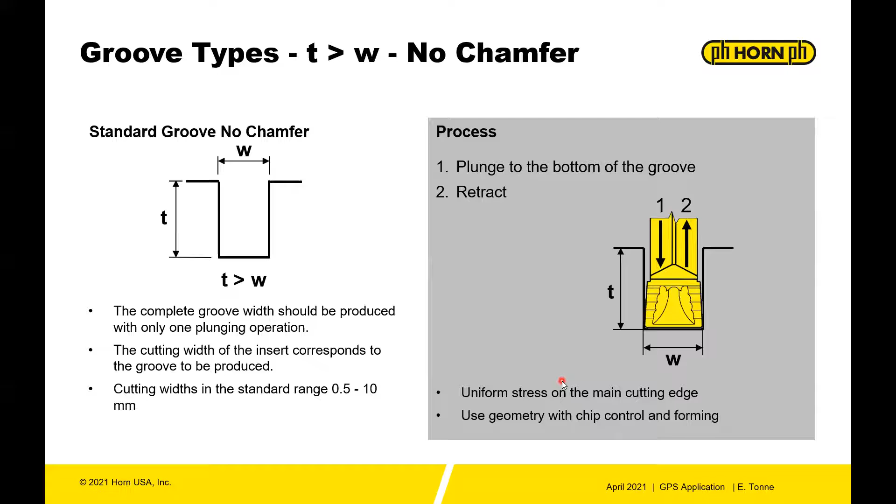And then the biggest is your risk of ring formation. So we've all seen the rings that can be produced on a part. You have to stop the machine to remove them so they don't damage other operations. And it's not a good process.

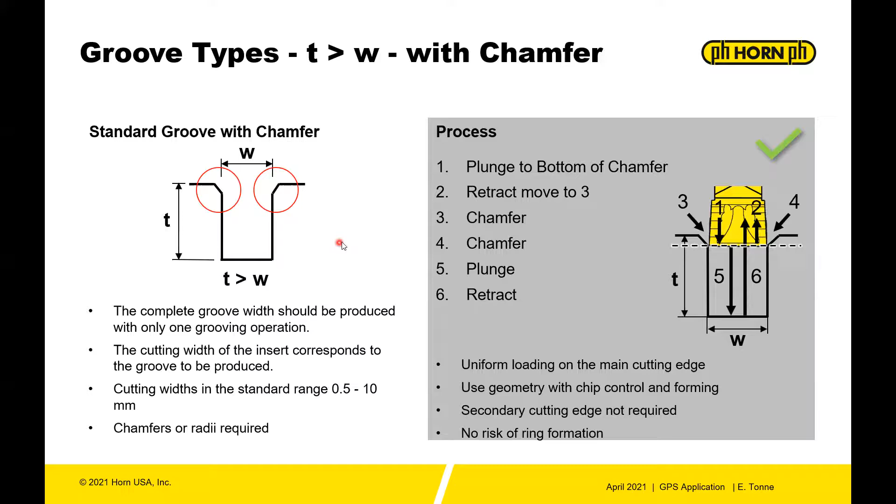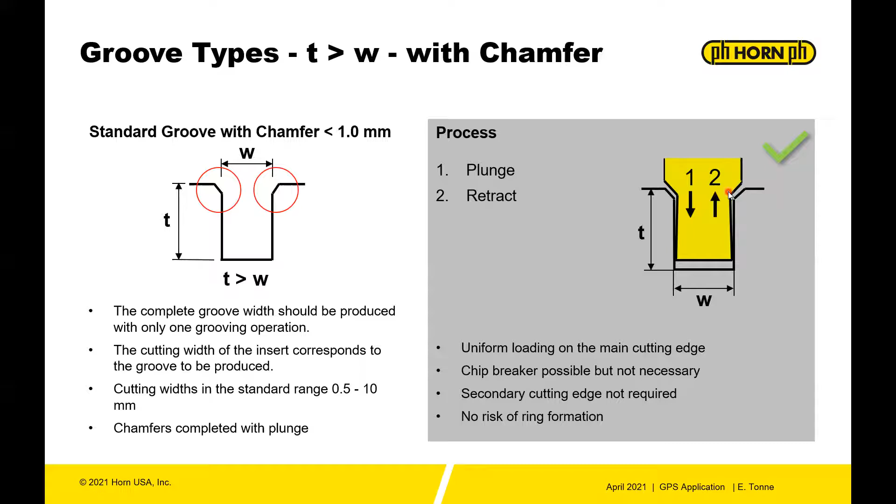You can also buy an insert with the chamfer built in. So that's a very simplistic way to minimize programming. No risk of ring formation because you're just plunging in, plunging out, and you're still getting those chamfers.

The other way to produce a groove, and this is a groove that is wider than your cutting tool. So the groove width is wider than your groover, is to plunge the center, then retract, plunge 2, and plunge 3.

Now, if you have a deeper part, a bigger part, it's better to go with the internal plunge first, or the plunge closest to the spindle or the fixing, the clamping, and then do the outside because that leaves you more room to have chip evacuation. In the case that you have very small parts, it's a good idea to pay attention to that and do the outside first and work your way towards the fixing, because you're removing some stability of the part. So keep that in mind.

So this type of process also involves partial cutting. So on the first plunge, you're using the full width of the insert, and then 2 and 3, you have a partial plunge. So it's really better to plan that out to be around 70% of the width. You don't want to go like 50-50. So plan the process out with the right width so that you can have one plunge in the center, and then you're still going to have 70% of the width here.

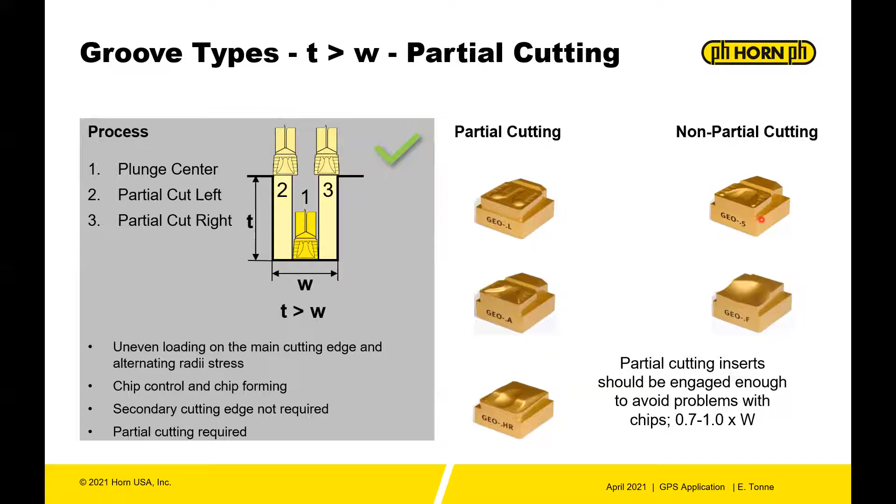You want to make sure you use a partial cutting geometry. So some of our geometries are not good at partial cutting. The L, the A, and the HR are partial cutting geometries. The S and the F are not. So we saw from our training last week that there are some that are not great at partial cutting. So you want to avoid those and stick with the ones approved for that.

The reason partial cutting can be damaging to your insert if you don't use the right type of insert is, in a partial cut and you have the right insert, the chip is funneled towards the center of the tool. And so that minimizes the risk of the chip hitting the opposite wall and getting tangled, or the chip getting hung behind the insert and causing damage to your insert.

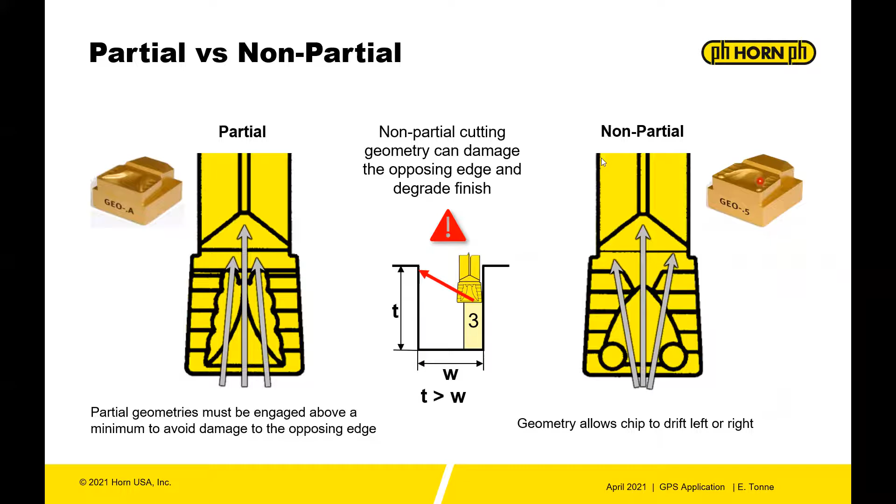So the A geometry here you can see is a good option for partial cutting, where the S is not, because the chip, once it passes the center point here, it's funneled, but then it can go what direction it wants. And so it's not a good choice for that partial cutting. Doesn't mean it won't do it, but we just recommend the A definitely over the S for partial cutting.

Another option to do a wider groove is to follow this process, which is to plunge left, 1, 2, and then plunge the upstand that's left, the 3. The advantage there is that you can increase your feed 100% for that center. So for instance, by doing that, you're going to improve the cycle time of this part significantly.

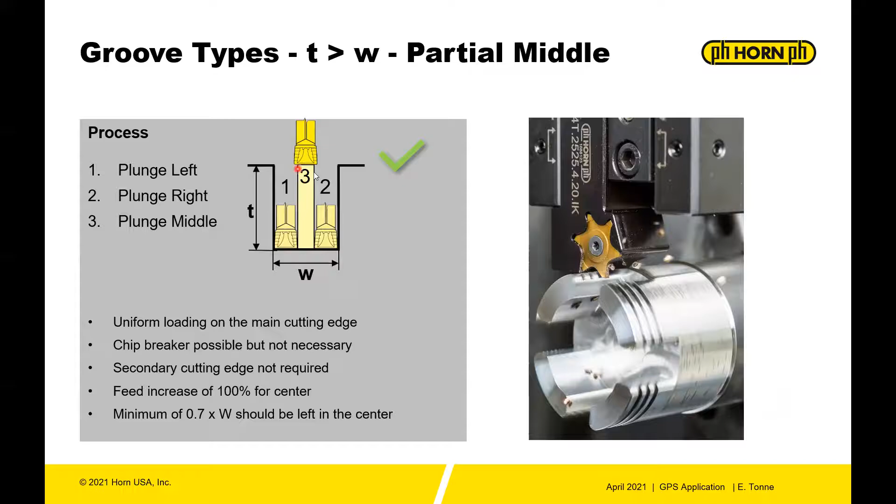Also, 70% of the width should be left in the center. You don't want to leave something that's too narrow that, instead of cutting, gets bent and causes a collision. So always keep that in mind. You want something of decent width there, 70% of the width, so that you don't have a part of the material bent and not cutting.

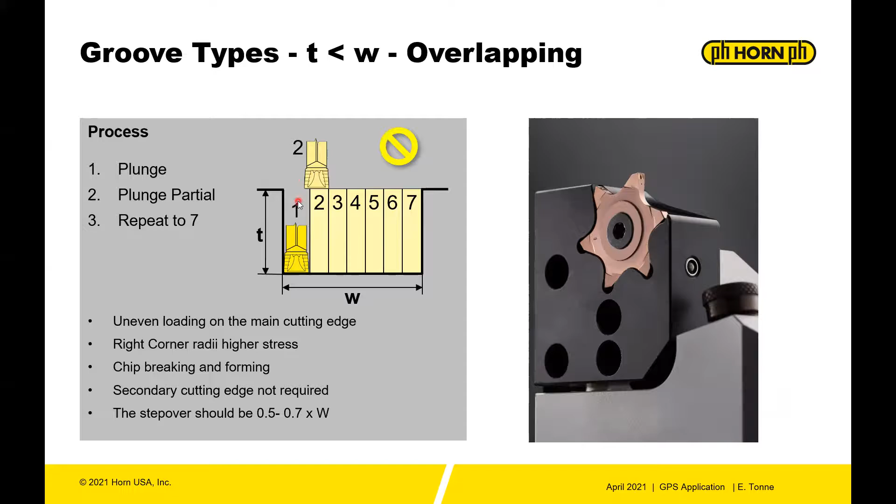A cautionary way that you can do a really wide groove is not recommended, but you can plunge and just keep taking steps. So plunge 1, 2, 3, 4, 5, 6, and 7. A better way to do that process that will save you time is to plunge and then skip plunge 2, plunge 3, plunge 4, and then take all of your upstands and plunge those at an increased feed of 100%. So you're going to save quite a bit of time because you can feed these at a faster feed rate.

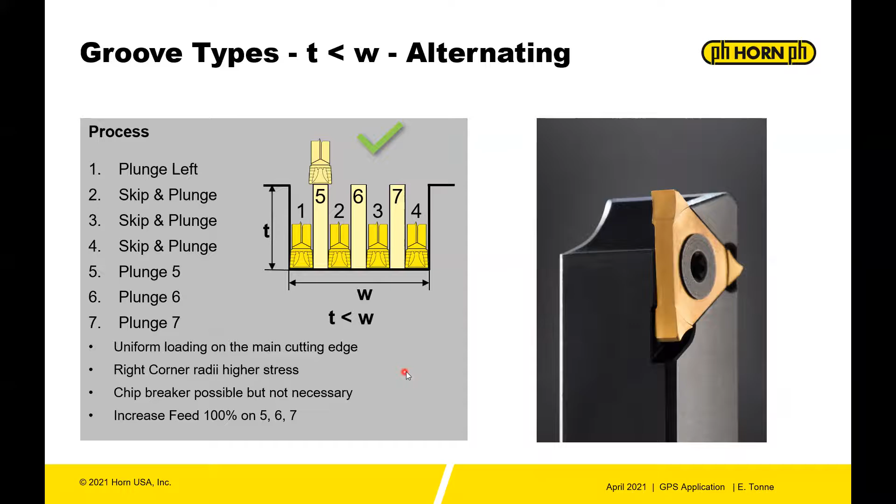So skip a space, and then plunge, and then plunge, and then plunge, and then come back and clean those upstands off. Again, make sure they're wide enough to cut rather than to collapse.

Another good way, if you have a very wide, very deep groove, is to utilize plunge and turn. So you can plunge and then turn to the right, plunge, turn to the left, plunge, turn to the right, plunge, turn to the left, plunge, and turn to the right. The key in doing it this way is to leave 5 times the feed rate at each level. So if it's 8 thousandths per rev, you're going to leave 40 thousandths each step.

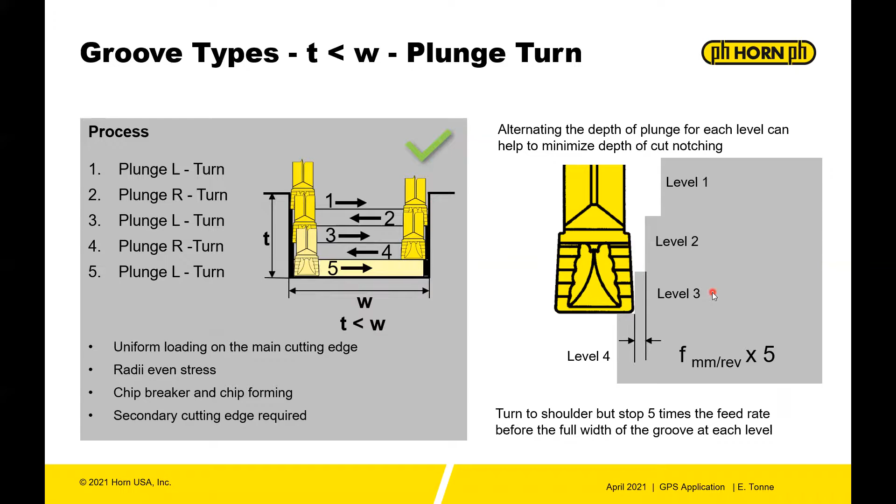And the reason to do that is because you're going to minimize the chance that you're going to pinch a chip behind the insert. You're going to leave plenty of clearance, and you're not going to have any collisions along the insert. So it just helps to minimize pinching the chip in the pocket. And then on the last part of this, you're going to plunge and clean up your stair step in 1 or 2 plunges. So 5 times the feed rate.

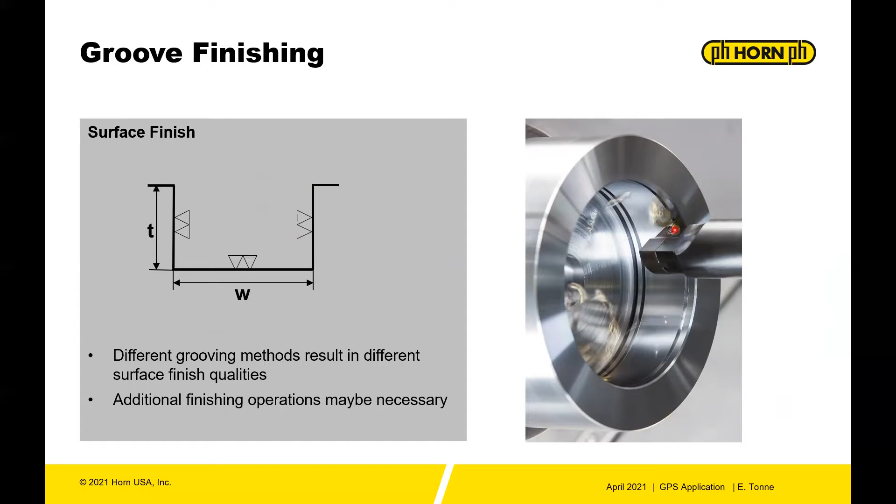All right, surface finish. Different grooving methods result in different surface finish qualities. Additional finishing operations might be necessary. Oftentimes, if there's a pretty stringent requirement on surface finish, you're going to want to rough with one tool and then finish with another, and that's going to give you the best finish, the best result. And to be honest, it's going to give you a longer time where your dimensional accuracy and your finish are maintained.

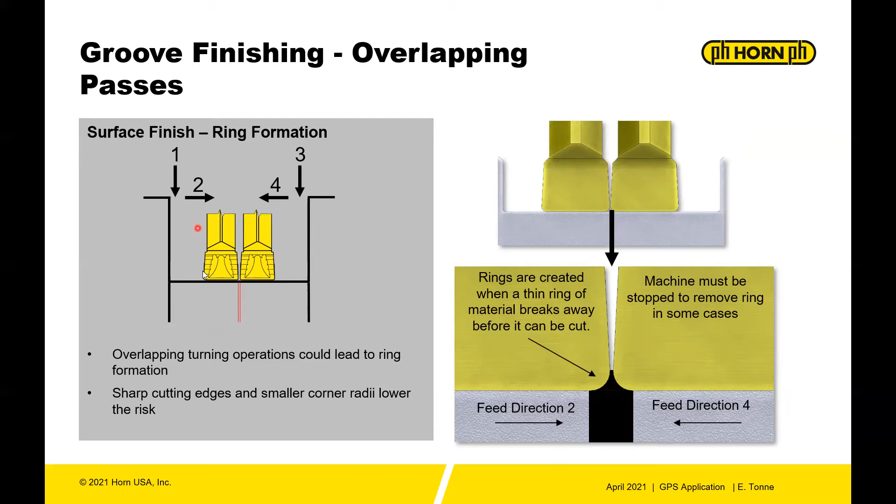So one thing to avoid in finishing is doing an overlapping pass in this way. So rather than plunge down the side and then turn, and then skip to the other side, plunge down and turn, that's going to create a little area and a potential for a ring. And you want to avoid that because you've got to stop the machine, cut that ring off if you have other operations, and it's just a hassle. So try to avoid the process of overlapping passes.

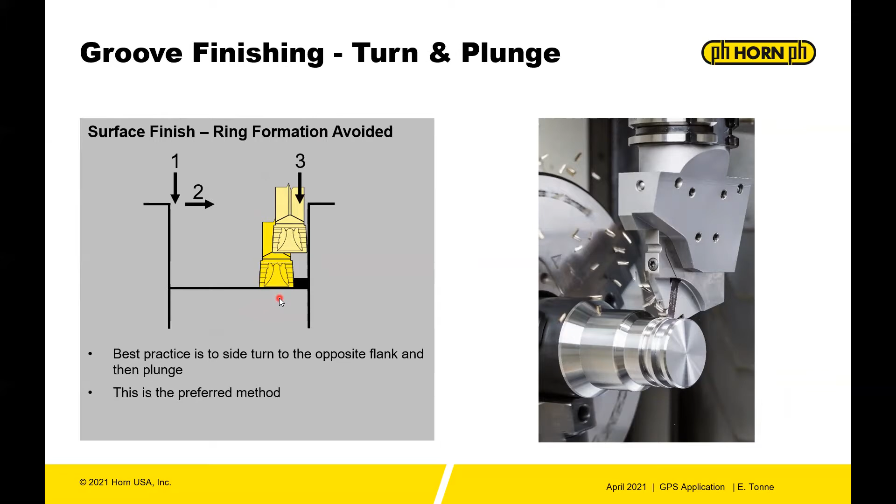The best way to finish a groove and also avoid the ring is to plunge and turn and just leave the least little bit at the end to do a plunge and clean up and match up with your other pass. This is the preferred method for doing a finishing on a groove.

If you make use of the grooving geometries that we have for finishing, like the NC, the ZG, our newest would be the FB geometry, then be careful of your overlap. Always just put an eyeball on the tool and make sure that you're overlapping the center, because the bottom on these tools is ground, but there's a relief in the center that reduces the pressure on that groover so that you don't get chatter and you get a better finish. So you want to make sure that you don't plunge down and leave material at the bottom.